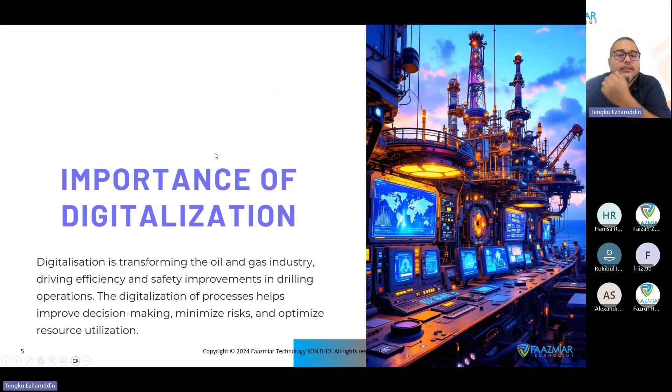We should expect operational efficiency to increase. By using digital tools, it should streamline our workflow, reducing manual errors and enhancing data accuracy. Moreover, automating this process with digital tools should free up valuable time for engineers and other professionals to concentrate on what truly matters, such as strategic decision making.

This digital tool will definitely eliminate the repetitive tasks that you have to do while analyzing data. Identifying trends, we should expect that, and it should also extract proper insights for you to make better decisions for the business.

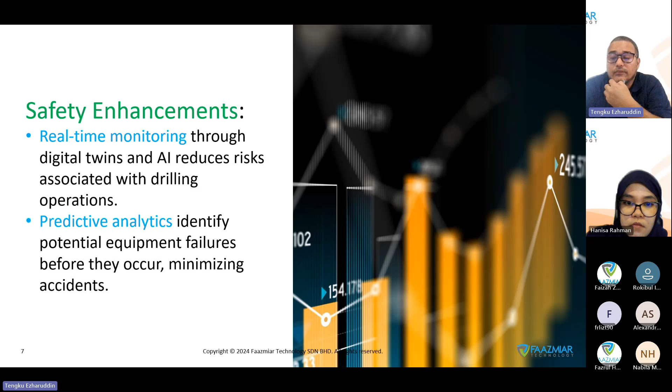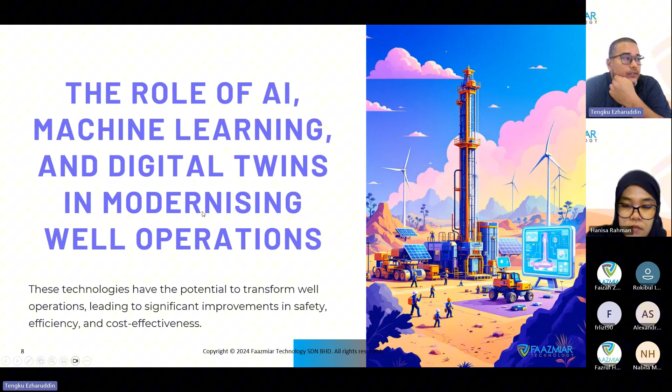We'll go into the role of AI, machine learning, and digital twin in modernizing well operations. This advanced technology is revolutionizing our view on data.

AI and machine learning can help us analyze big, vast data sets, and from there we should be able to extract insights from the patterns and trends that we get from the data sets. Then we can create an algorithm to help us analyze through complex data sets and identify patterns and trends.

Some patterns, like in drilling operations, are very small and minor. They're usually ignored by us humans. With the algorithm, we can extract these kinds of misses that humans can't identify. From continuous learning, we can build predictive capability. As more data becomes available, this algorithm can continuously improve its capability to predict. This means companies can anticipate anomalies or failures earlier, and then we can optimize and tweak the operational workflow.

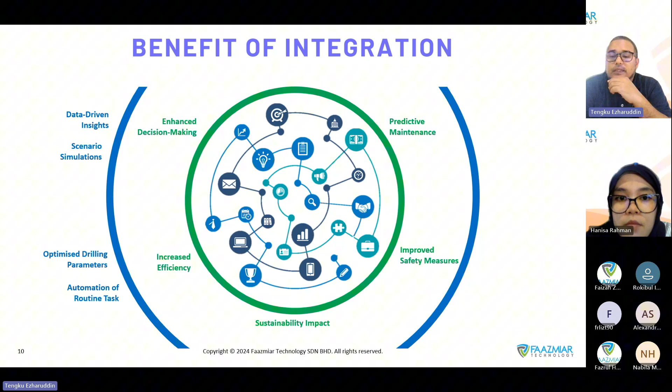On predictive maintenance, digital twin is used by Siemens to monitor their gas turbines, so they can predict potential failure. Gas turbines are very costly to shut down - once you shut down a turbine, you lose production. By predicting potential failure, we can minimize downtime and manage maintenance costs better.

Improve safety: there is real-time hazard detection and training simulation. ExxonMobil uses AI-driven analytics together with a digital twin framework to detect potential hazards in real time. Potential hazards can include red zone management - somebody not wearing a hard hat can be tagged and an alarm triggered.

People sitting or walking under loads - there's a lot of training simulators out there. For instance, with ADI, you can send your driller or drill supervisor to see and feel what happens to the operation when they control the joystick. Let's say during drilling too fast will generate cutting - a lot more cutting than you can clean out. It will create pack-off. It will create stuck pipe.

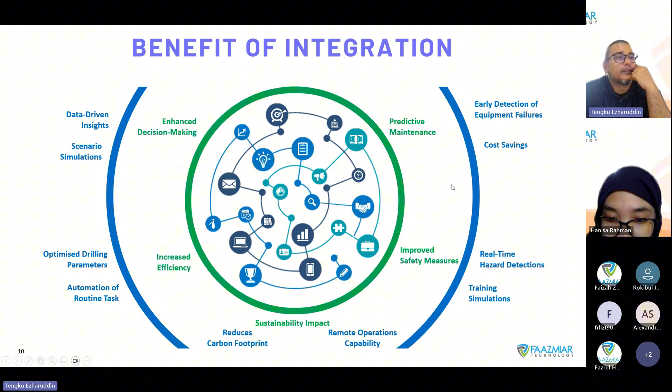We'll go into digital twin.

Is there any question from anybody? Am I going too fast, or are you okay? Yeah? Okay, alright.

Digital twin - I'm not sure about the syllabus, but I think you should be learning it in uni as well. Digital twin is a virtual representation of your assets, your processes, your P&ID, anything - it can be anything. Your downhole environment, your seismic, production lines. But what digital twin needs is data.

So by having sensors, cameras, from that, the technology in digital twin, you feed it with the actual data, then you can see the simulation, and then you can analyze. From that analysis, then you can do the performance optimization. So with that, you can facilitate your planning and optimization better. So digital twin, it's not only on the real time environment. You can use digital twin before that as well, during your front end engineering, when you do your well planning stage.

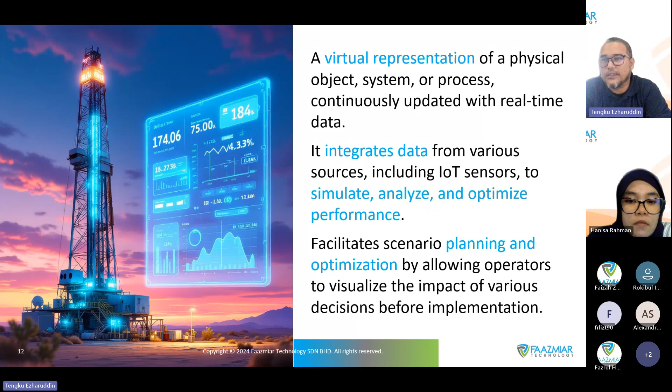Okay, some key features of digital twin technology. So we have real-time data integration, obviously sensor readings, continuous data flow into the system, and then this allows detailed understanding of the technology of the workflow that you are handling, and then from there, simulation capabilities.

So from that simulation, you can generate a predictive model. On that predictive model, if there is a trend deviation between the actual and the model, then you can know that there is something happening. There is an anomaly. Why is this changing? And why is it deviating from the model? We should be expecting this. Then you start to investigate what is the cause of it.

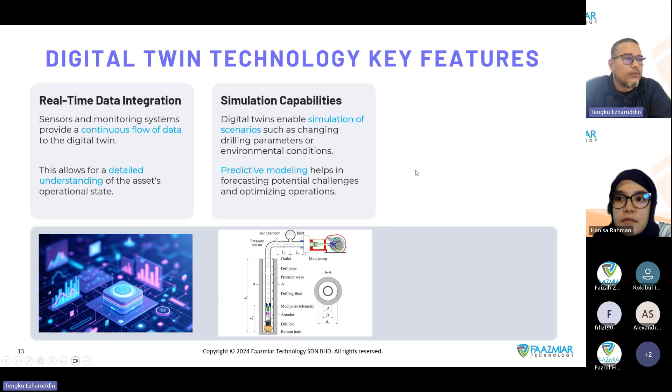So from there, you can do life cycle management. So with digital twin, you get insights. From that insight, it gives you a better understanding, and then from there you can plan and allocate resources appropriately based on the historical data and predictive analytics. That's on the key features of technology.

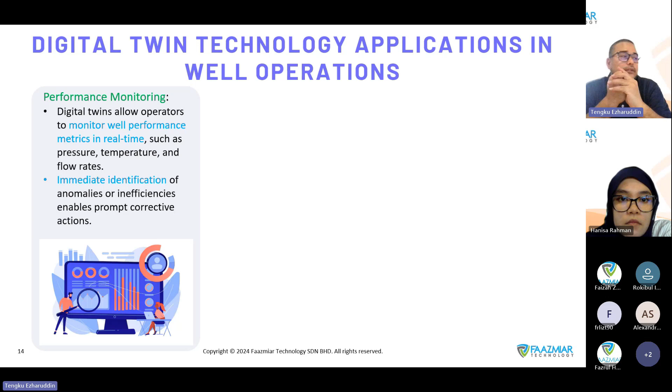So and then we can go into digital operation. Drilling automation, same principle. We can see it's an advanced application where you have the model, all those things running at the background, and then you link it with the drilling control system of the rig, and then the drilling control system automation platform has its own logic to mitigate certain issues. So when there is deviation in your digital twin, it sends back that signal, or you need to pick up your string because you are having back off. So the digital twin system will send a signal to the hoisting. It will pull up or ease off. That's on the drilling automation part.

So this relatively improves - not relatively, if we are talking about operation in Norway, they actually can, because they use robotic arm to do making up pipe stands and breaking out. Over in our waters in Malaysia, the slip time usually between 5 to 6 minutes. In Norway, they actually operate within a 3 minute window to do that operation alone, to make up a pipe, picking up, off slips.

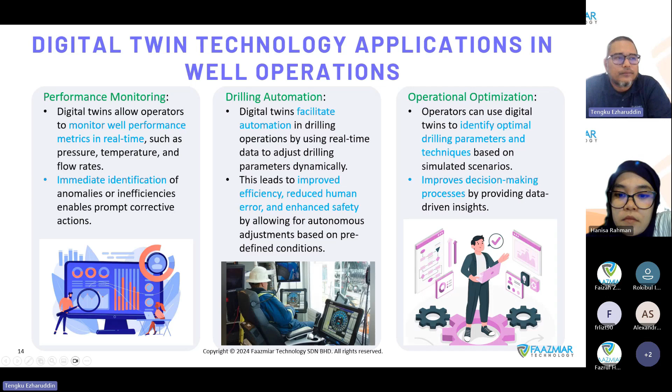And then operational optimization. By combining this, you can refine, you can improve your operation. You can always drill with your optimal parameters. If you have routine sequence, it will be, I would say, perfectly done by the automation. One sequence to the sequence, so you can repeat the sequence with the precise input that you give the machine. So that's on the digital twin.

Role of AI and machine learning. So we have four components: data analysis, predictive analytics, enhanced decision making, and automation of routine tasks.

So we have talked about vast data sets. We have talked about real-time analytics. Like BP, they employ AI to analyze seismic data from geological surveys. By processing seismic data, which is a large volume of data, BP is able to identify potential drilling sites with higher accuracy. So just from the seismic itself,

let's say traditionally you plan 3 exploration wells, or maybe sometimes 5 or more for one area, to find the best place to build your platform, and then start your engineering process to plan your trajectory and whatnot. So by this application of machine learning and AI technology on seismic data, they were able to reduce the exploration cost, and make a better decision on where to set their platform.

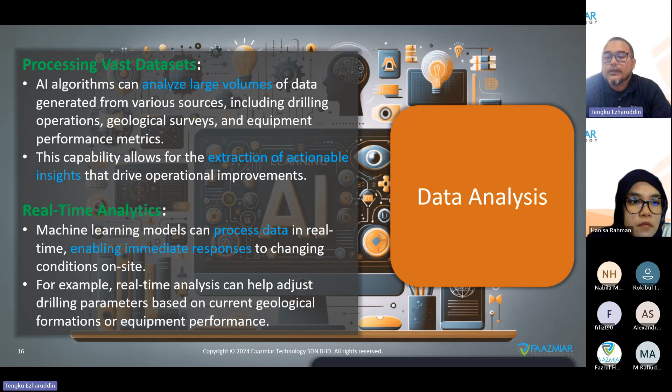That's on data analysis example. So predictive analytics. In drilling technology, I think we still have a lot of work to do, because the drilling or upstream environment is very volatile, I would say. Too many anomalies, too many factors involved - different stratigraphic, different geology, subsurface conditions, the drilling fluid itself, different rheology can change. But equipment failure has an extensive reach in downstream facilities asset management.

So they integrated the P&ID of an asset. They can build a 3D image by scanning using drone cameras or whatsoever, and then build a digital asset. From there, they run a digital twin based on that P&ID. They know if the flow is restricted, which valve is faulty or needs maintenance, all those things. So we can see a better example in predictive analytics in the downstream sector.

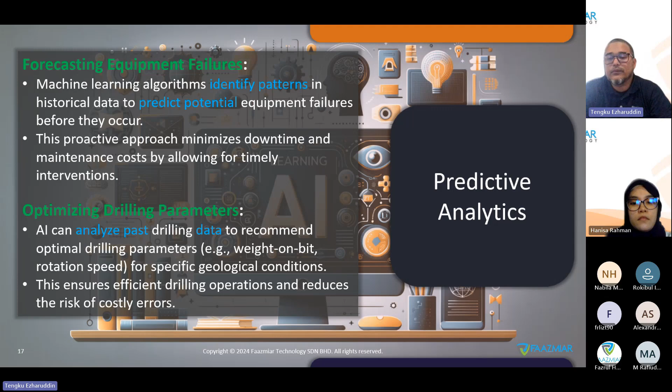And then we go to enhanced decision making. Again, BP uses AI to monitor equipment health in real time - same example as before. As for scenario simulation,

like Norwegian - previous Statoil, now known as Equinor - they are big in doing scenario simulation. They have what they call a drilling well simulator. So you have your planned well, then you start feeding in what-if scenarios. If you have stuck pipe, what would cause the stuck pipe, and so on. That is done in a room with a drilling chair, a cyber chair, and then you have the topside visualization, and the downhole visualization. It's a way to work on your planning, and from that simulation, when you are simulating, you find the issue, or probably you have to shorten a section to give better hole cleaning on the section below or whatnot. So in Norway - they have been in the digital journey longer than us in Malaysia.

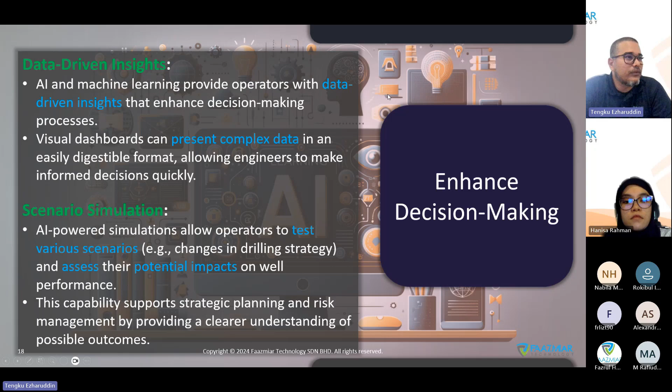And then lastly, to automate the routine tasks - drilling automation is going towards this direction. Now you have SLB, Halliburton, Baker - they have automatic directional drilling automation. So now you have automation on your directional drilling, automation on your surface equipment, and automation on your downhole condition. So this loop cycle is the automation routine for drilling.

We have run three projects with Petronas on this type of automation. So obviously it does provide better efficiency because all the repetitive functions have been replaced by automation. In terms of handling anomalies, not all, but several - I think there's 5. If we're talking about the system that we bring into Petronas, they have 5 anomalies that can be handled by our system. We'll talk about that a little bit later on the case study.

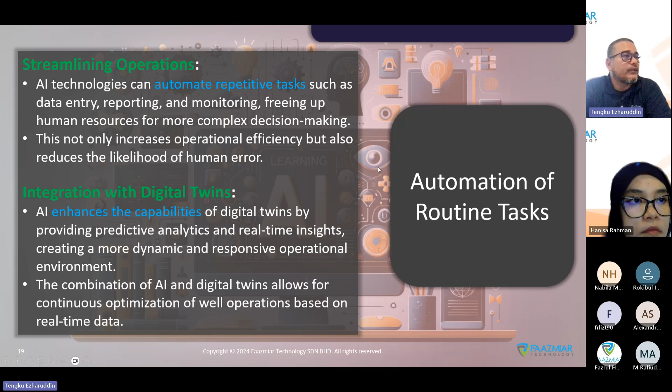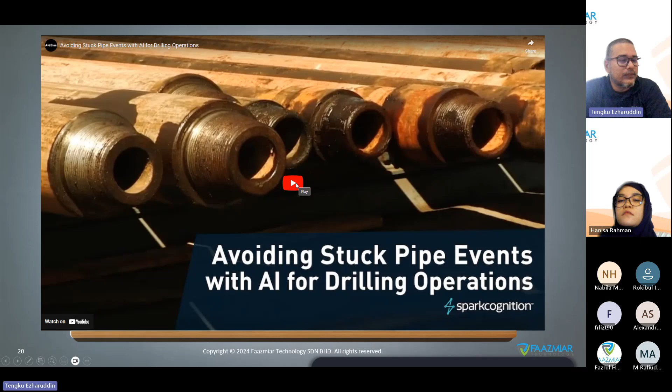Okay, let's see one video on stuck pipe event. This is from SparkCognition - they built an AI model to predict stuck pipe.

So, okay. Let me start again. Successful.

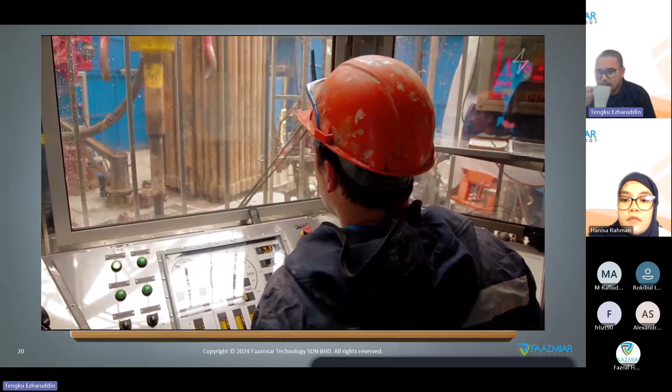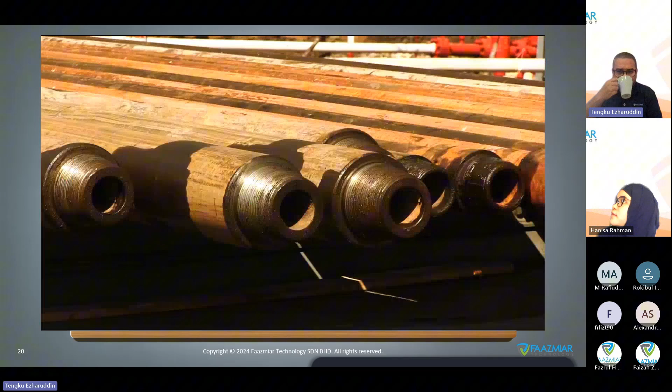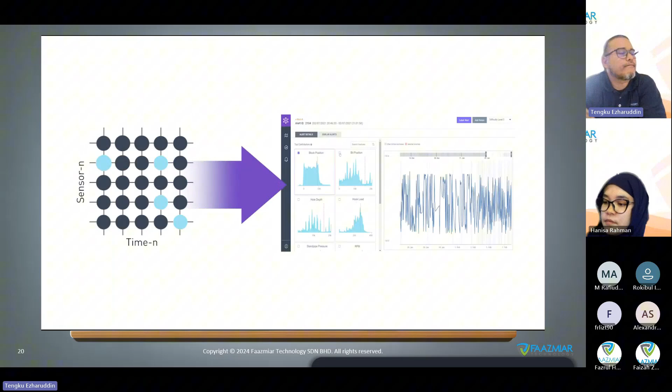In high-cost, high-risk drilling environments, drilling operators may encounter a critical challenge known as stuck pipe that threatens successful well completions. Stuck pipe can bring drilling operations to a complete halt until the drilling string is freed. It is one of the most expensive problems that can occur during a drilling operation and is a major contributor to non-productive time, which continues to comprise 20 to 25% of annual rig operating time. While physics-based modeling is unable to flag leading indicators with enough advanced warning, predictive analytics for anomaly management and machine learning-based modeling approach can detect and prevent drilling anomalies such as impending stuck pipe failures well in advance.

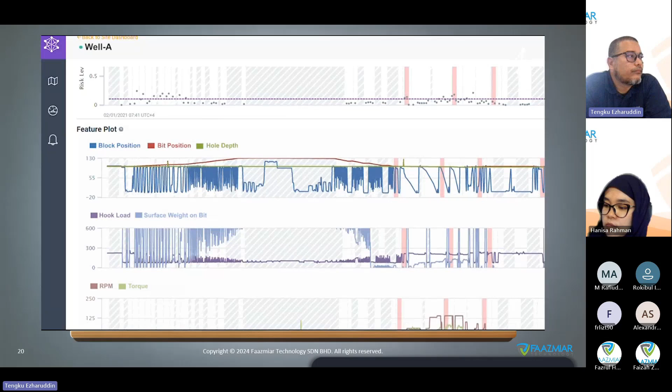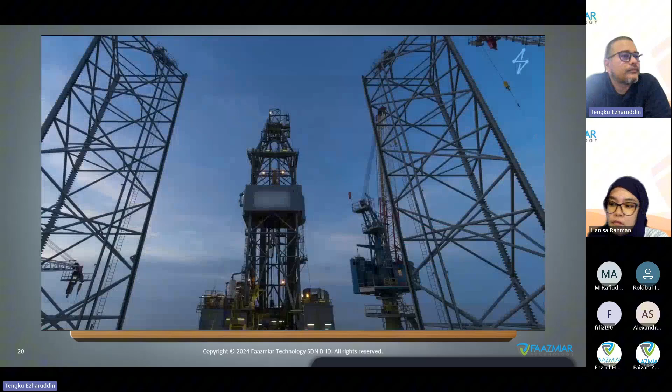SparkCognition, a leading industrial AI company, offers a robust predictive solution that helps drilling operators identify and prevent stuck pipe events. In our recent case study, we deployed our machine learning models across multiple wells and drilling rigs for a large operator in the Middle East. The SparkPredict product for anomaly management predicted 79% of overall drilling anomalies, including stuck pipe events, with up to 6 hours advance notice, saving the customer upwards of millions of dollars in drilling costs and downtime.

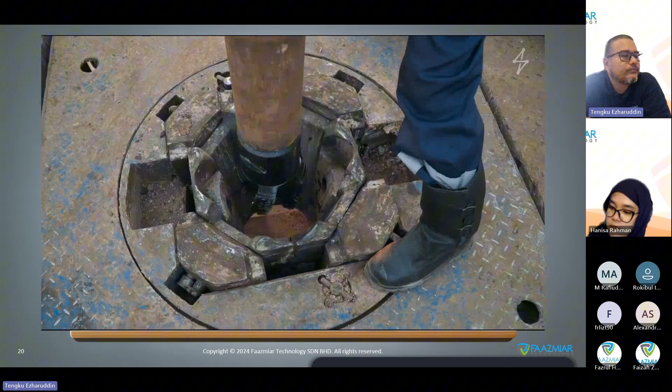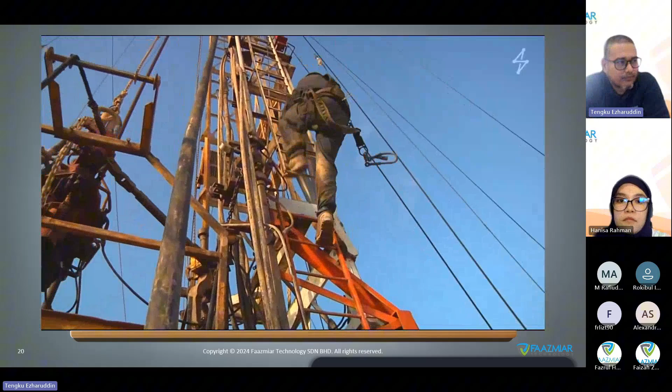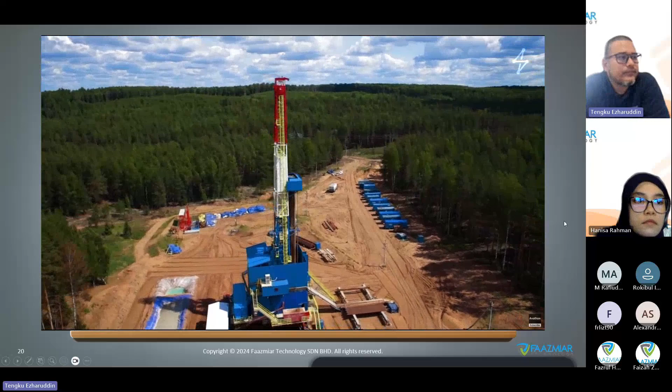In past offshore deployments, SparkCognition increased the ability to identify unexpected events by 75% and more than doubled previous lead times. By detecting anomalies that indicate stuck pipe in advance, operators are able to better plan for or even avert stuck pipe events, but also mitigate drilling dysfunction and optimize drilling operations, enabling safer, more predictable operations. To learn more about how predictive analytics and machine learning-based modeling can help prevent stuck pipe events, contact us at info@sparkcognition.com.

I cannot cut the last part because I took their video, I have to include that. Okay, alright. Before we go into the case study, do you have any questions, or should I continue?

Okay, so in this case study, the system that we use is Drilltronics. It's a rig automation system by Sekal, a leading Norwegian technology company.

Before we go into Drilltronics, into the technical part, so rig automation -- from here, we should see insights and then have an efficient and safe operation.

When you talk about automation, the simplest example is automotive. So in general there are 6 levels, but level 0 is manual, so I exclude that. In general there are 5 known levels: level 1 is human control with machine, human suggests options -- that's level 2. Level 3 is computer suggests options. Level 4 is computer proposes action. And level 5 is full automation.

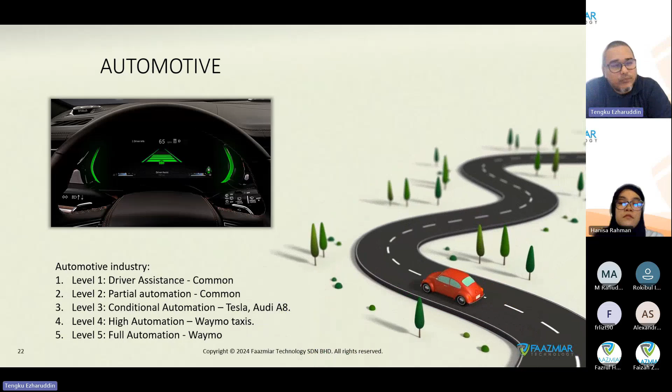So if we link this to drilling automation -- in automotive, if you look at the lane assist, your right and left lane, you can imagine that as your pore and frac gradient limitation on your left and right. And your adaptive control, the distance to the car ahead, that can be your ROP optimization, where you can slow down the speed or accelerate when the condition is safe. That's the easiest way to imagine drilling automation in terms of automotive.

Okay, Drilltronic covers level 3 and level 4 drilling automation. In level 3, Drilltronic operates alone, it will handle most of the drilling tasks under specific conditions. The driller still needs to be in charge when there are unpredictable scenarios, such as when you are tripping out and suddenly you have stuck pipe. At the moment, there is no automation to mitigate stuck pipe or replace the driller to perform the task to free the pipe, so when the pipe is stuck, the driller has to take control.

That's level 3. Level 4 is high automation -- this is when we combine all three automations that I mentioned before: directional control automation, subsurface condition automation, and topside automation. That's level 4.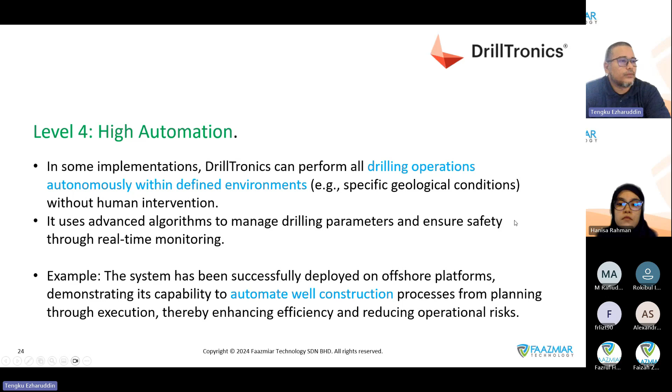Before I go deeper into Sekal technology, let's see this video.

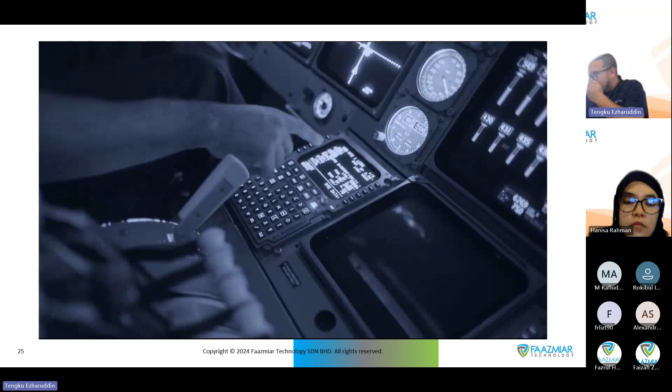As our world turns ever more digital, industries are challenged to become safer, more efficient, and predictable in their delivery. The aviation and automobile industry have been successful frontrunners in their drive towards autonomy and automation.

Sekal is taking the same leading role in the drilling industry, challenging existing truths, forcing competitors to change tactics and pace.

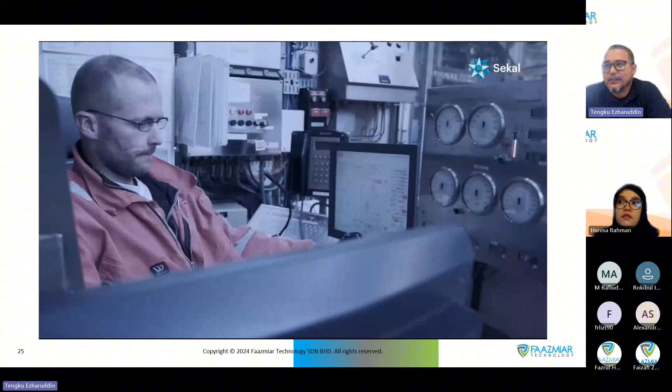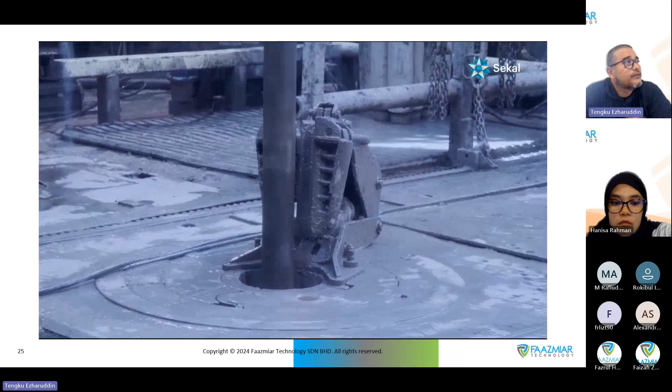Today, drilling operations are surprisingly inefficient and unpredictable. Up to 50% of all operations run into major unforeseen problems, causing costly delays, unnecessary sidetracks, and lost production. Today's drilling practices are still best described as fumbling blindly in the darkness.

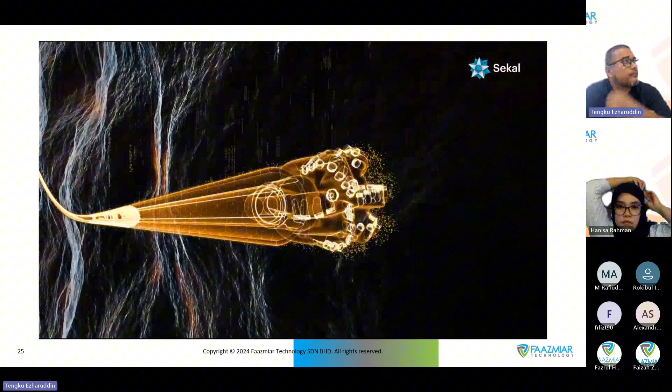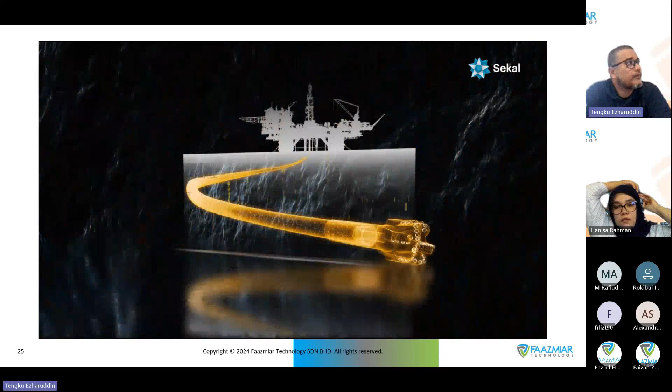Sekal is the globally leading software provider, bringing autonomy to the drilling operations. We use advanced dynamic modeling combined with artificial intelligence and machine learning when improving the planning and execution of drilling operations.

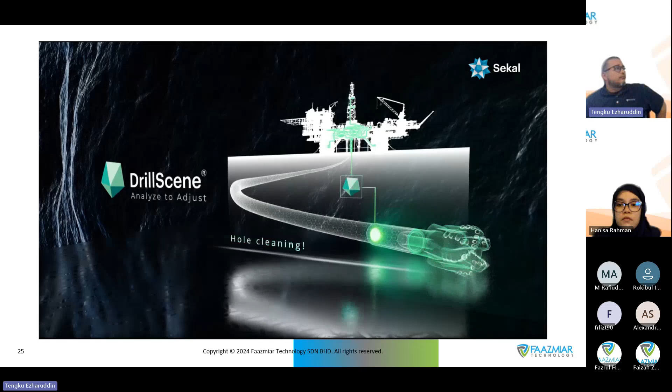The DrillScene Artificial Intelligence software compares Sekal's advanced digital twin to the actual ongoing drilling operation. Deviations give early notifications, allowing the team to react in time, like the GPS in a car, notifying the driver when the route should be adjusted.

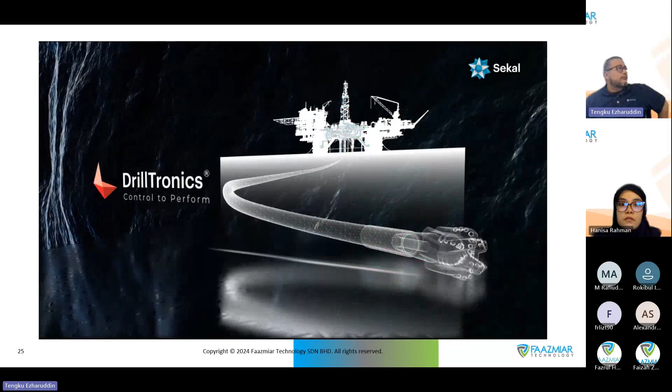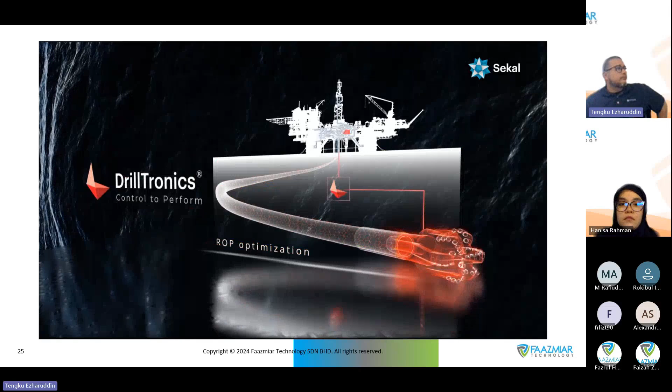Drilltronics optimize the reaction of the drilling machinery in line with the dynamic and changing downhole conditions. It safeguards the well, improves efficiency and supports the driller, just like traction control, adaptive cruise control and ABS brakes support the driver in a car.

Combining our products gives the ultimate client value. Drilling becomes safer, more consistent, efficient and predictable.

Sekal is the industry leader. Allow our intelligent software solutions to drive your performance to the next level. Right now, we are powering autonomous drilling.

Okay, bombastic. When it's marketing material, everything's bombastic. So, okay, Sekal is our technology partner to Faazmiar.

So it has three software. It has DrillExpect. This is like a simulation, pre-run simulation tool to generate your torque and drag, to see your swab and surge effects.

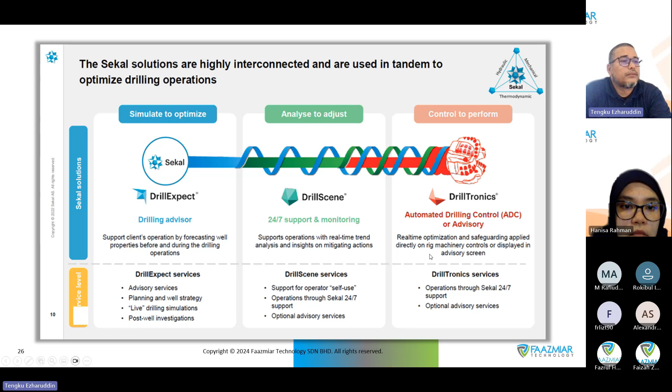So this is the three platforms, the three software from Sekal. So this is the rig automation general workflow.

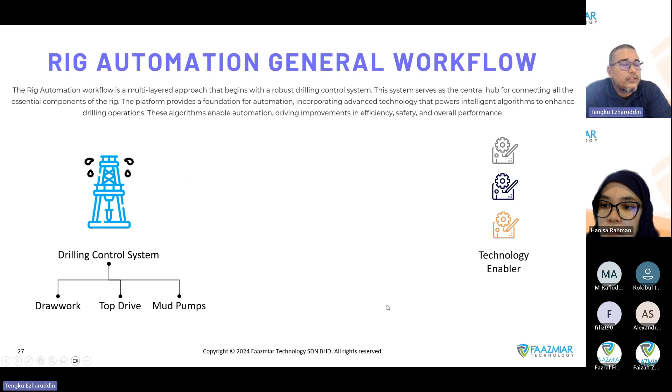So we have the control system. We have the technology enabler, Sekal is one of these, SITS is one of these, one of the technology enablers. Then you have the automation platform, which usually links with the drilling control system provider. And then you have the automation technology.

So the automation platform and drilling control system communicate both ways. It reads high frequency data, transfers it to the automation platform, which will monitor for deviation. This is where the digital twin sits, in the automation technology.

So if there is any deviation, the technology will send a command to the automation platform. The automation platform will send a command to the machine, either to hoist up on the drawworks, or to slow down or shut down rotation, or slow down the pumps.

This is only a simple way to understand this. So basically, you have one, two, three levels to enable rig automation.

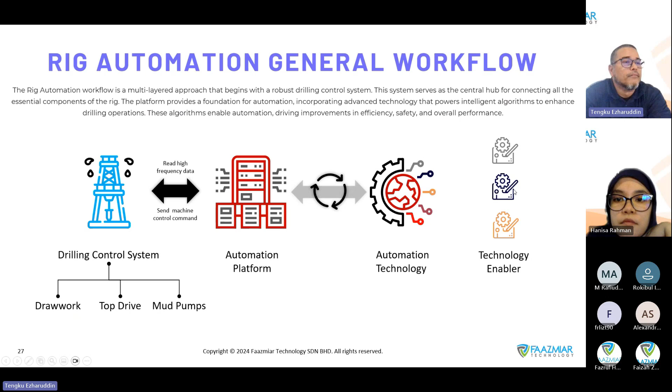Okay, on Drilltronics, this is the rig automation for Drilltronics. So it automates. There are three functions: we have dynamic safeguard, and then we have automated safety triggers.

Dynamic safeguard will protect your swab and surge function. So let's say you are pulling out of hole, and your pore pressure and your mud weight are very close, so you cannot be pulling out too fast. When you pull the string, Drilltronics will control the pulling out speed of the drawworks. Max flow will auto adjust your flow rate based on your pore pressure as well.

Safety triggers will cover hook load, will cover torque protection and pack-off protection. And then with Drilltronics, you can also have automated functions.

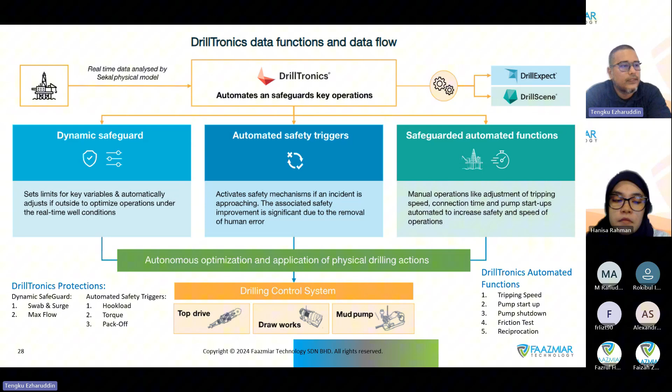Then it links towards the drilling control system. The previous slide is side to side. This one is specific to Drilltronic function, from top to bottom.

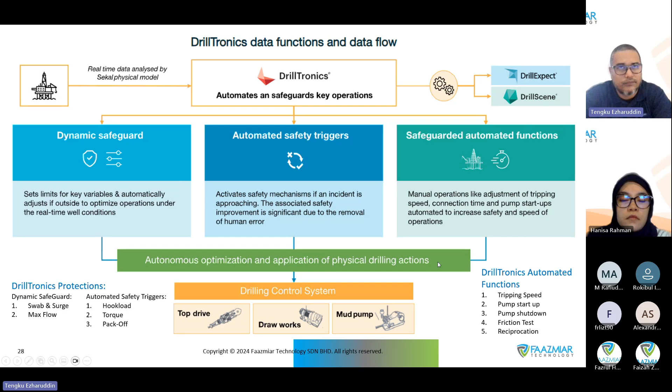This is an example of a rig control automation, drilling control system automation platform. They call it the human machine interface. You can see this screen on the left. When you open the menu, you will see a lot of listing functions - what do you need to do, what do you want to do - you want to circulate, you want to ream, you want to come out of hole?

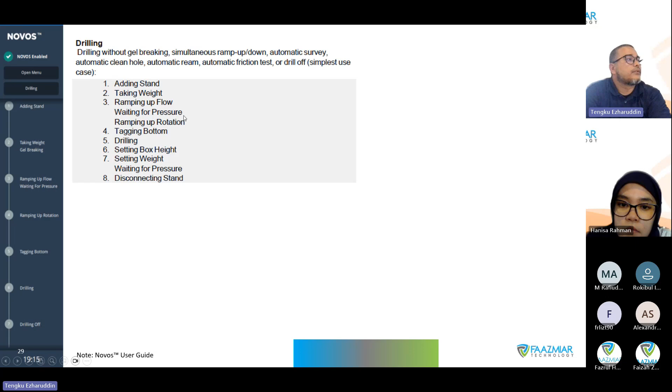So for this example, it's the driller choosing a drilling option. Once the drilling option is chosen, I call this the recipe: adding stand, taking weight, ramping up flow. There is a simple function with less detail, and then there is a more elaborate automation flow when you want to start drilling.

Once the driller starts the automation, the system will pick up the stand, pick up the string, and then it will automatically lower the string while ramping up, wait for pressure to stabilize, and then automatically start the rotation, and then tag bottom. Once tag bottom, it will go to drilling automatically. Towards the end of the stand, it will drill off a little bit, and then pull back.

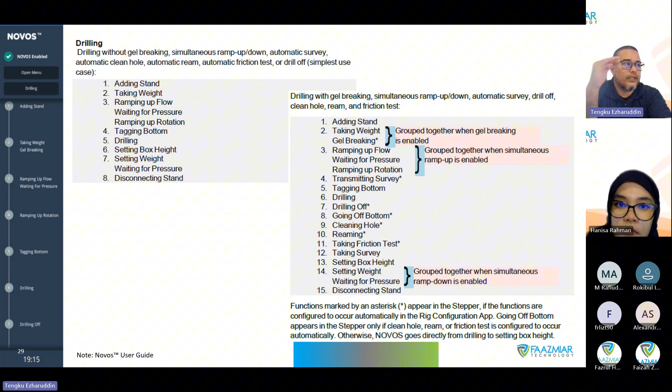It goes to box height, meaning box height is where you put the slips. Once you are at box height, the pump will drop, rotation will stop, and then it will disconnect the top drive from the drill pipe, and then go and repeat the next stand by adding stands for drilling the next stand.

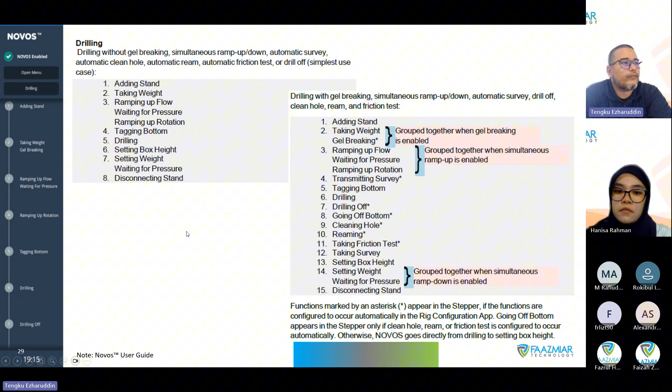This is the full features of the human interface, Novos human interface. This is all individual apps - you have rotation apps, circulation apps, equipment control apps, tag bottom, and many more. Every time it's just like your phone - when you open an app, it will show an icon up here. So this is the DrillTronics app that is built into Novos HMI.

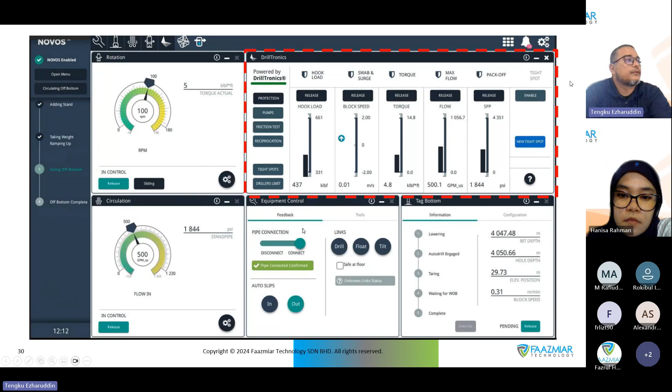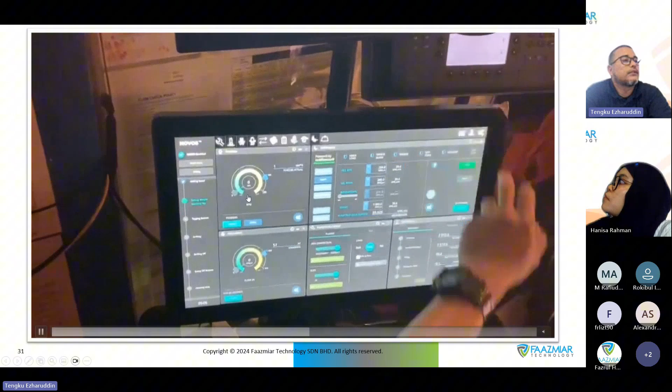Example: pack-off protection. Pack-off protection means you want to avoid the hole from packing off, usually from drill cutting or solid accumulation. By doing so, we should expect a better wellbore integrity, because you are not fracturing the formation in the event of a pack-off.

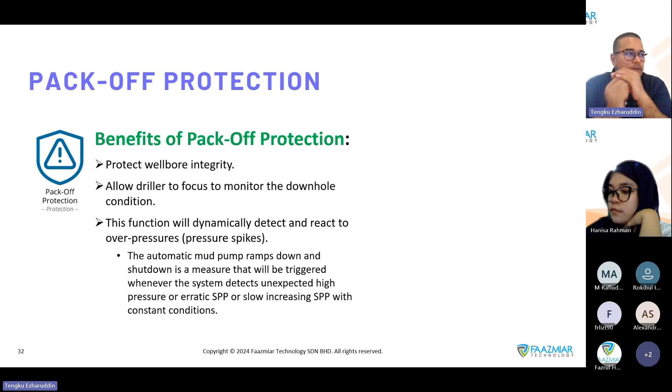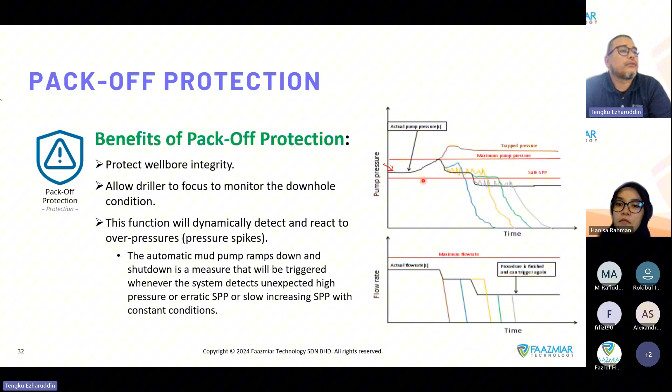Okay, this is an example. I was not able to generate...

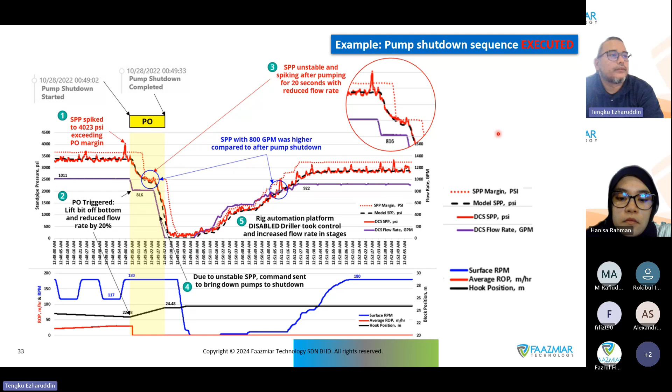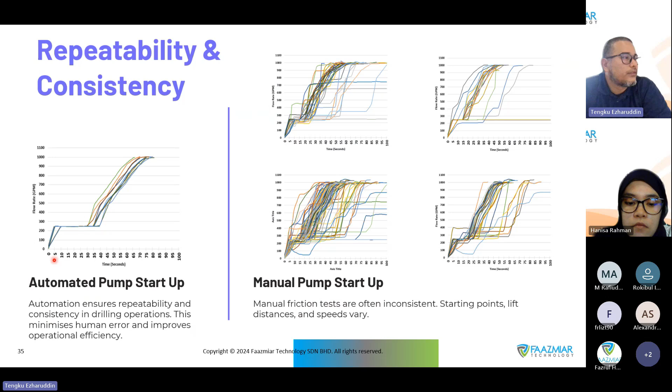And with automation, although the dataset is not large, we can see the consistency when we use a machine to handle this function. So this is within 75 seconds, you have a stable pressure to continue drilling. Over here, it can go much longer.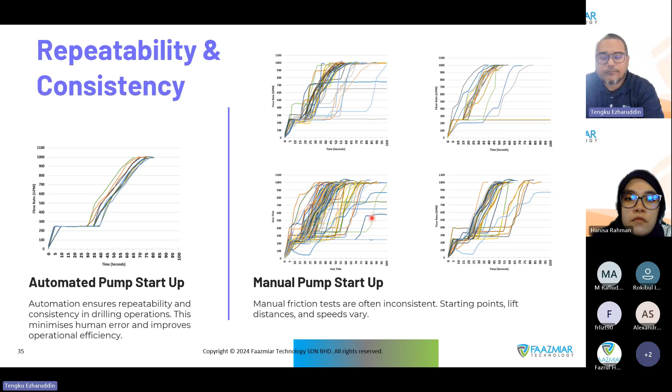Either they do it too fast or too slow, but this depends on the pore and frac of your formation. Next, friction test. Friction test is to provide consistency on the input parameter to get your results.

So when the stand down, or after you circulate, when it goes towards the friction test function, it will pick up your stand a little bit, about 0.5, 1 meter, and then it will stay stationary with a constant flow rate and RPM as per what you set in the application.

At the end of this point, the rotation will stop automatically. It will hoist upward to take your pickup weight, with or without flow. That depends on your setting, and then it waits a little bit before the turnover, and then it will hoist down your block to take the slack off weight.

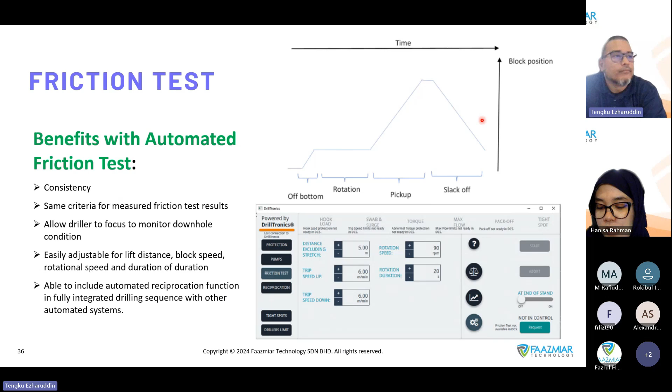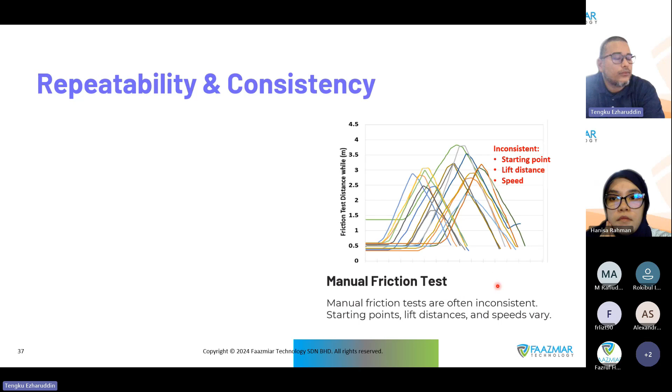And then from this, it gives you more confidence to read your pickup and slack off output. This is a pickup and slack off output from DrillScene. So DrillScene, our system, picks up the pickup and slack off data automatically.

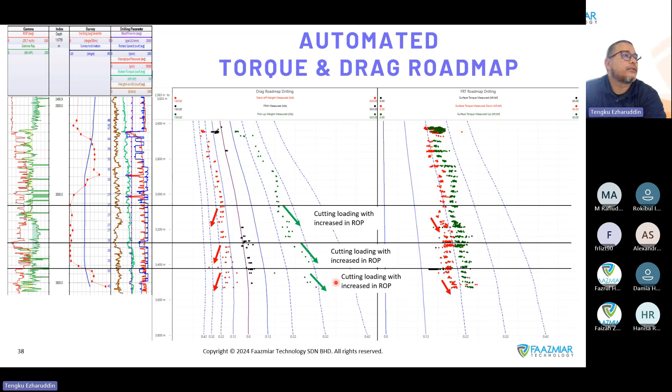Okay, swab and surge.

Swab and surge is a semi-automatic function. In theory, if your pore and frac have a wide margin, let's say your mechanical limit of pulling out your derrick, your sheave can handle a maximum of 1 meter per second. If your operating window is wide, you can pull every time to your mechanical limit, which saves time. But if your subsurface margin is narrow, you don't want to pull too fast, you want to stay within your margin. If manual, the driller has to watch the indicator and control the speed. But in automation, the driller can pull the joystick to maximum, and the actual tripping speed is controlled by the system, by the machine.

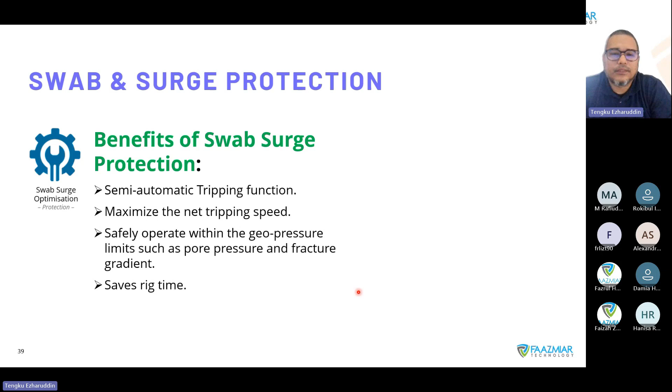Just as an example, on this one we cannot do much because it's a narrow margin, too narrow, very close. The mud weight and pore pressure are very close, so they have to pump out of hole. Although we could pump out at 1.1 meter per second, operationally we don't want to go too fast because we don't want to potentially swab the well. In terms of analysis, it doesn't suggest we'll swab the well even pulling at a faster speed, but operation-wise they dictate we want to pull at this speed only.

And then from 2,200 meters, they were able to pull on elevator. You can't really see the difference because the gray line is the actual speed and the blue line is the theoretical speed, so you can see the actual speed is following the theoretical speed. The system is being utilized to the max over here. Then as we go shallower, you have to do flow checks, handle deviation, all those things, so they slow down the speeds.

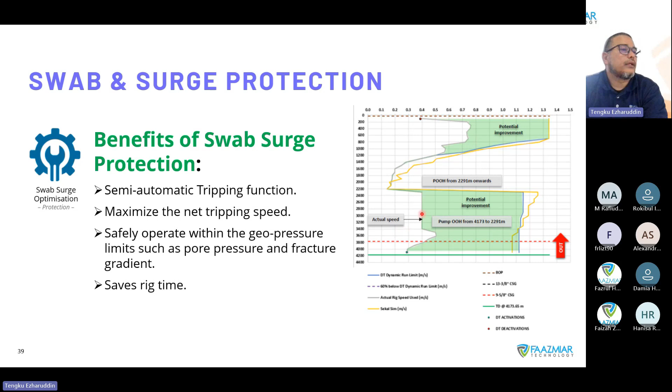This is a video, a playback, but you can see how to play this. Okay.

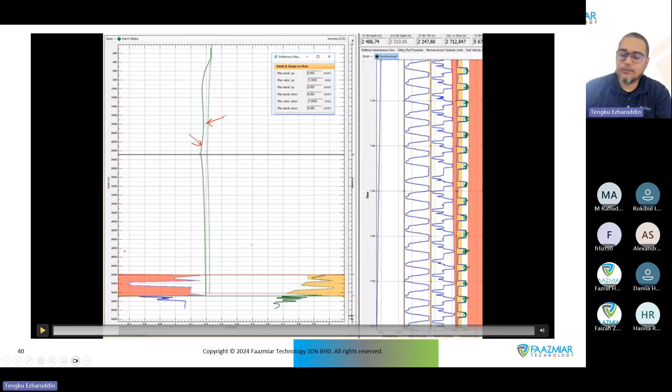So this is pore pressure. You can see the swab pressure is not crossing the pore pressure with the automation. This is the block velocity, going, this is pulling out. This is your maximum limit, this is your swab limit. So you can see the actual speed is not crossing over the yellow shaded line. It's being maintained within the speed limit suggested by the system.

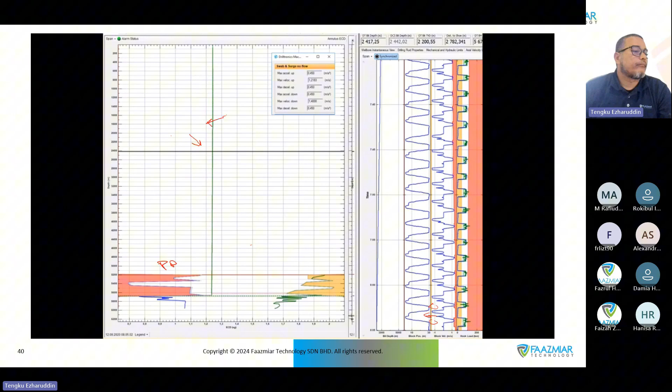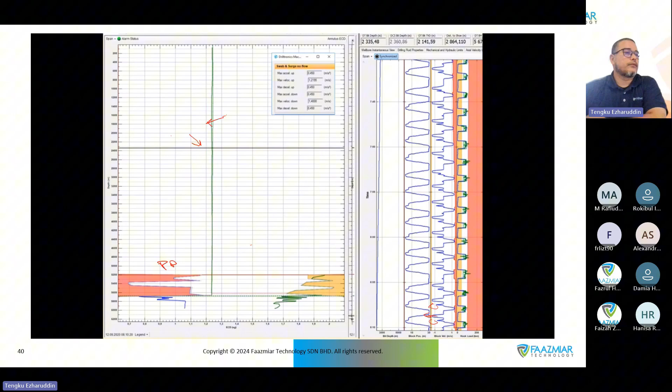Right, okay, it's just, there you go, you pull. And racking back the stand, going down to pick up the stand, and then pull. You can see the swab pressure never exceeds the pore pressure. That is one of the benefits of using swab and surge protection.

Okay, that is all on the example, a real case example for drilling automation technology, using a digital twin. Can't really show the AI and machine learning function as a whole from the drilling automation.

Anyway, we are almost at the end of our session. As technology continues to evolve, the potential for fully autonomous drilling systems will surely expand. It will reshape operations across various sectors. Digital twin and AI are not just trends, they are transformative technologies. Hopefully, with the correct implementation strategies and clear direction from the organization, it can give results, improve efficiency, higher standards of safety, and sustainability of the oil and gas industry.

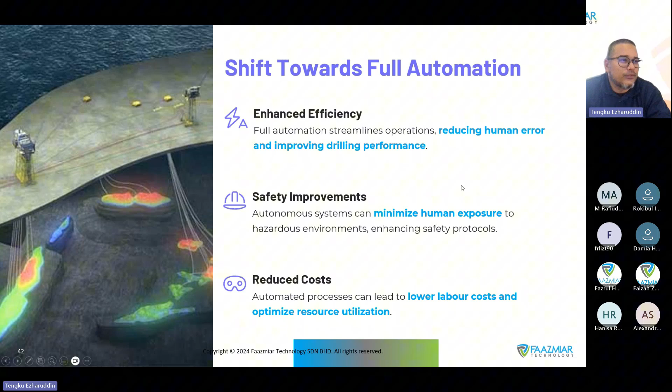This is just an article from GPT.

End-to-end solution and beyond. I am not a fan of the idea that a single solution can solve everything. I doubt it can be done, because, for example, like SEKAL technology, no company in the world at this moment has reached the level SEKAL has achieved with drilling automation.

So it's a matter of preference for our client. Somebody prefers a different solution for real-time operation, for example, and then for well engineering they want to use a different provider. You can have all this, but then...

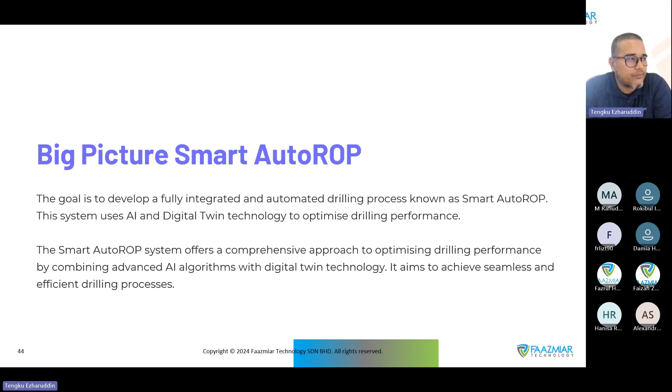In terms of SEKAL, this is what will be coming, I think, early next year. They have Smart AutoROP - it's like an adaptive drilling system. They build an auto ROP optimization machine learning model, then they combine it with the Drilltronics continuous wellbore physics model, and they build another ROP constraint server. They link all this to provide an auto ROP solution.

So if you see this triangle, the Sekal model - in principle they have a hydraulic model, a mechanical model, a thermodynamic model. But with auto ROP, they add another model here, which is bit response.

So with adaptive constraint, you drill, for example, at 100 meters per hour, and your hole becomes loaded with cuttings. Without a digital twin, you will not know how much, or where, the cuttings you've drilled are distributed along the well. So running smart auto ROP within the Drilltronics environment, if at a certain point the bed height or distribution of cuttings is too much and the hole cannot handle it, the auto ROP system will take control - if it's in active mode. It will reduce the speed and let the cuttings clean out a little before continuing. So it adapts to the downhole condition.

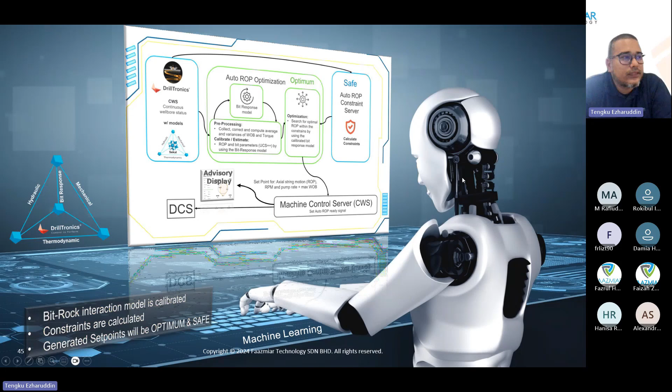I think there are 5 factors that need to be considered, as a closing, to have a successful digital twin adoption. One is the data security risk, and this is a big issue.

If I'm not mistaken, last 2 months - this is October, so in August - Halliburton had a breach in security. It was a big deal, a lot of downtime. But globally also many major oil companies have incidents related to data security.